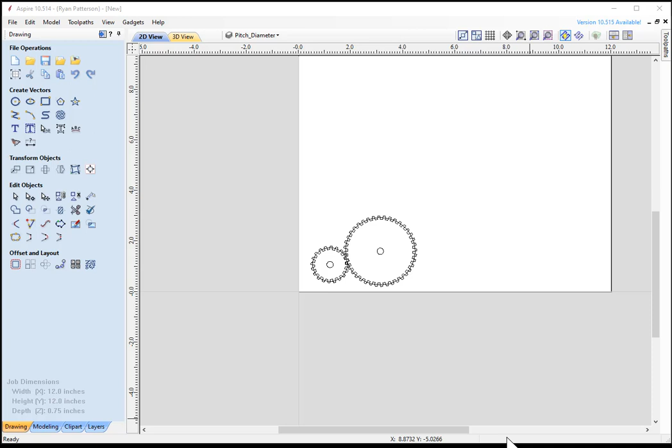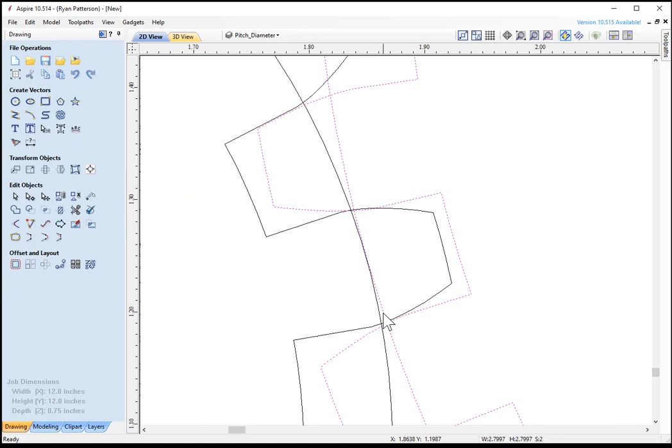This video is going to cover how to create two different diameter gears, and also how to ensure that those two gears have mesh and will operate and function mechanically with one another.

To start off with, we're going to go into the gadgets and then the gear making gadget. The first gear's diameter can be changed in three different ways: changing the number of teeth, the diametrical pitch, and the pressure angle. This is an involute gear that we are going to be creating. The pressure angle and the diametrical pitch are what's used to determine and create the profile or shape of the gear tooth.

Once we have entered in one gear and we want a bigger or smaller gear, the only way to change the size of these gears and still have them fit and mesh together is by changing the number of teeth. I'm going to bring this number of teeth down to 20, and change the size to put this gear in the center of my job. Going to go ahead and click create and then close. So this has given us one gear with a total of 20 teeth.

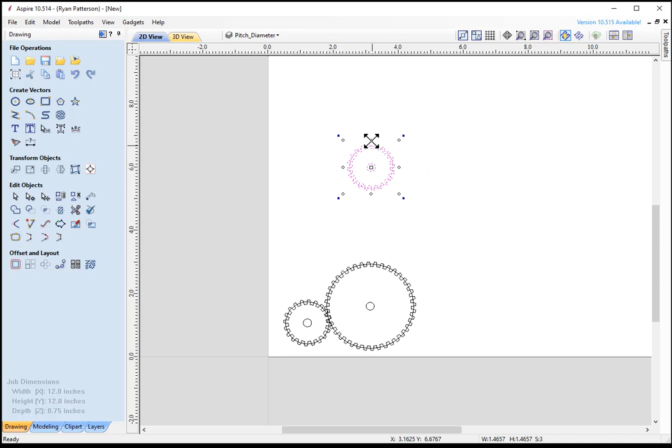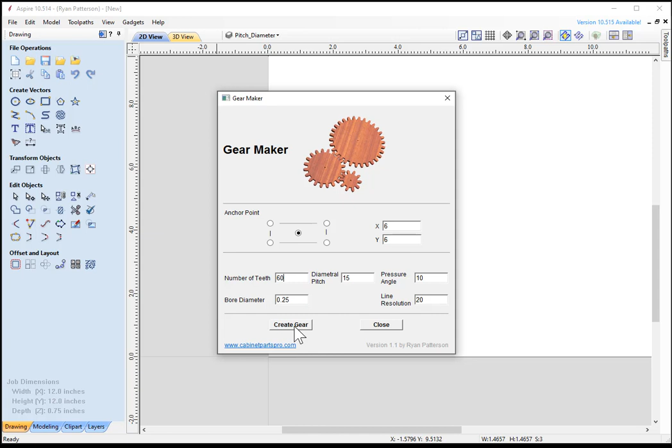If I want a larger gear that is still going to mesh with this smaller gear, the only way to do that is by changing the number of teeth. Let's go ahead and increase that to 60 and then click create gear. So we now have two different gears of two different sizes.

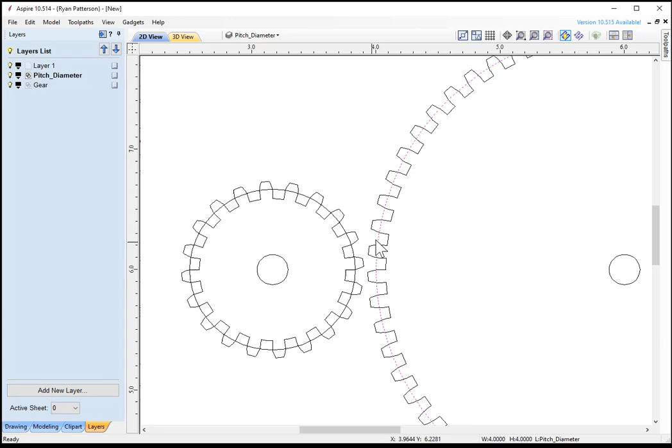The profile of each one of these teeth is the same, so these are going to match together. The way we can ensure this is using the pitch diameter circle of both of those gears, which is on a new layer. That pitch diameter tells us how far away the center of this gear needs to be from the other gear.

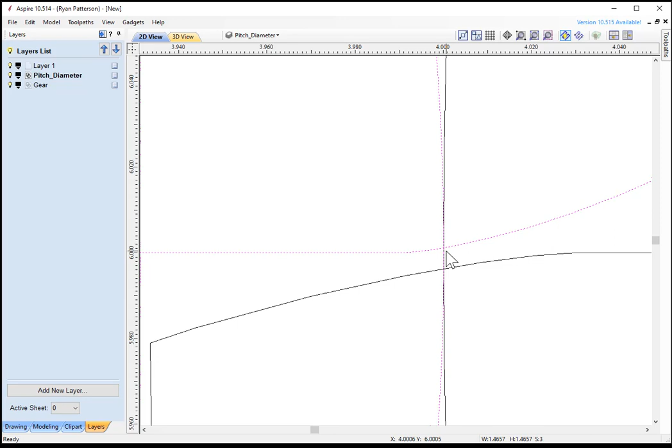So if we just zoom in, I'm going to use the arrows on the keyboard and just bump that gear over until those two circles are touching. You could go in and measure the radius - that's the proper way of doing it - between both, and then add the radius of both gears together, and that is the distance from center to center from each gear.

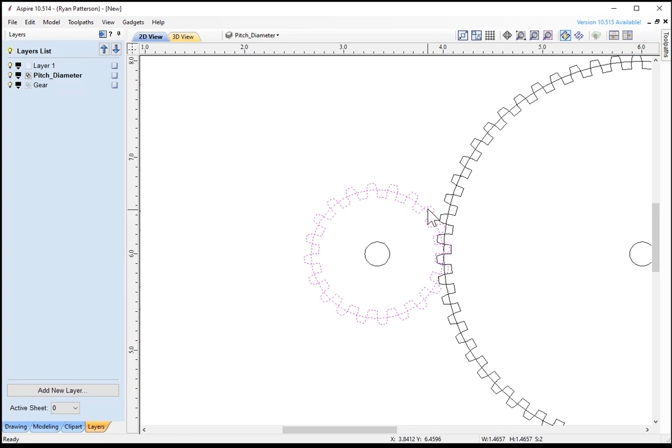Just quickly to show, once those are entered in there and we are touching, I'm going to click on that gear to be able to rotate it around. We can see that we now have gears that are going to mesh and work mechanically with one another, and the sizes have changed.

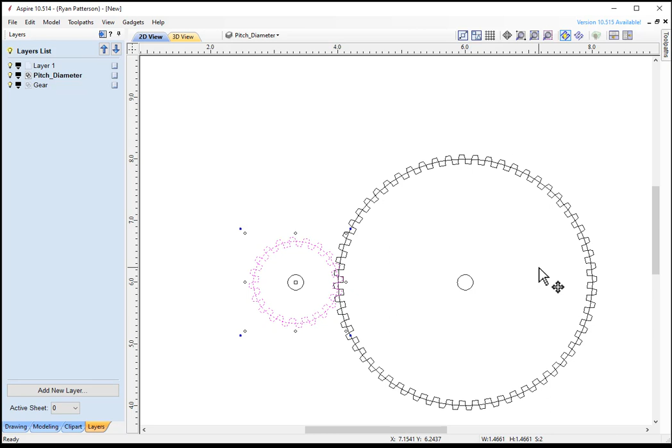So again, the only way to ensure that two gears are going to mesh and work together is to make sure that both gears have the same diametrical pitch and pressure angle. Then the only way to change the diameter of the gears is to change the total number of teeth.

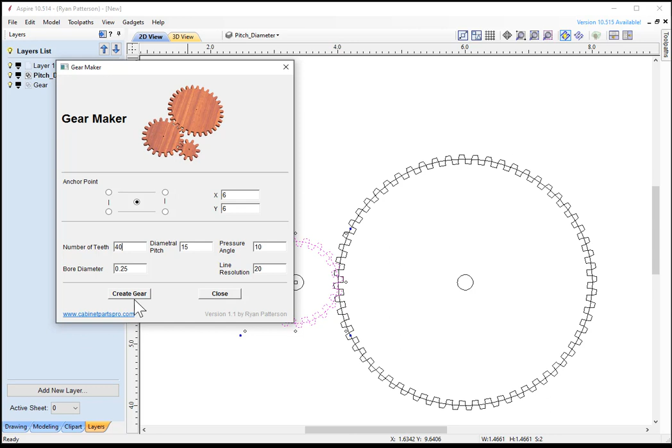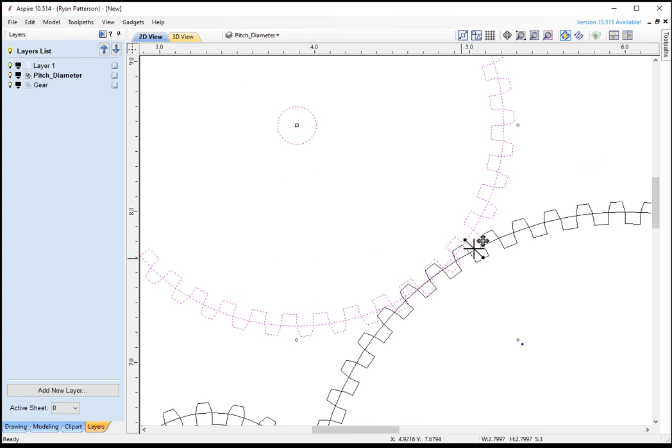So that was a 60. We could go ahead and put in a 40 and create that gear. Closing that and then moving that off, and again just using the arrow keys to make sure that those pitch diameters mesh up - that is where that gear is going to fit and have those teeth mechanically work with one another.

So hopefully this helps clear up some of the issues you might be having with gears meshing and changing and not fitting with one another.